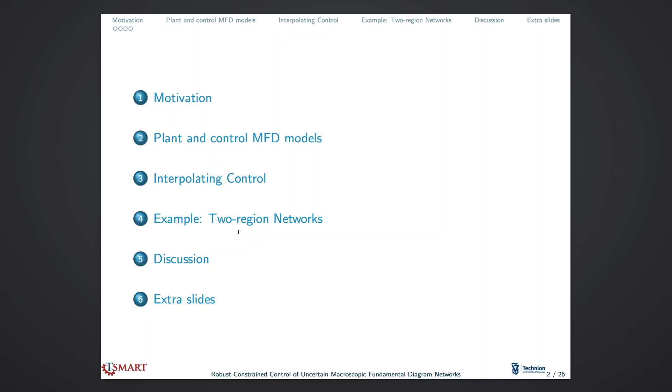The first one is the network structure. So some works deal with single region networks, while other works consider networks consisting of multiple regions.

Regarding heterogeneity, okay, someone should turn off their mic because I hear an echo. So regarding heterogeneity, there are some works that have treated heterogeneous networks by partitioning them into homogeneous regions, while recently a few works have integrated heterogeneity modeling into the MFD framework.

The dynamic equation based on MFD, in most research works, relates the average traffic network flow versus accumulation, but there are other works that relate total travel distance against total time spent.

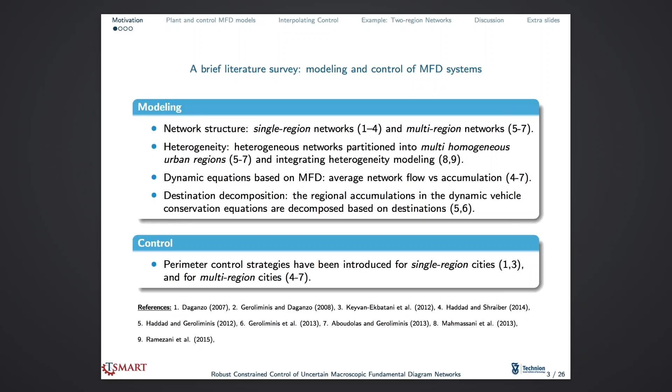These control strategies have been designed according to different approaches. One of the classical approaches is classical feedback control, resulting in a PI or P controller, or whatever feedback controller. This approach operates according to fed information, but without the need to predict near-future dynamics or demand. On the other hand, it does not allow direct consideration of the control constraints; these are usually imposed after the control design process.

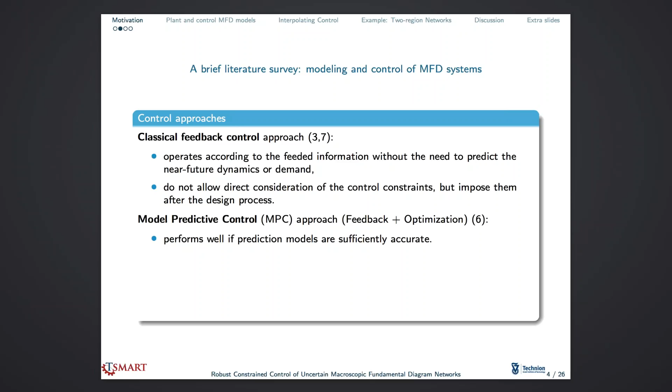Another approach is more like feedback combined with optimization. It's called model predictive control, which, roughly speaking, includes not only feedback but also optimization for a finite prediction horizon in order to integrate future dynamics. In other words, these kinds of approaches are proactive, not only reactive. This approach works well if the prediction models we assume are sufficiently accurate.

Recently we have introduced a robust control approach for perimeter control by utilizing the classical robust feedback approach. We have utilized QFT theory, quantitative feedback theory, to design perimeter control. We designed a robust perimeter control that can handle the uncertainty of the MFD.

And what do we mean by handling uncertainty in the MFD? What is uncertainty for us in the MFD is that it can have a scatter of flows for the same accumulation. In this work, the control constraints are explicitly integrated within the design level.

We use a special approach called the describing function. But we applied QFT only for one urban region, because QFT is suitable to design for only one urban region, or maybe two regions, but for larger systems it would be difficult to utilize.

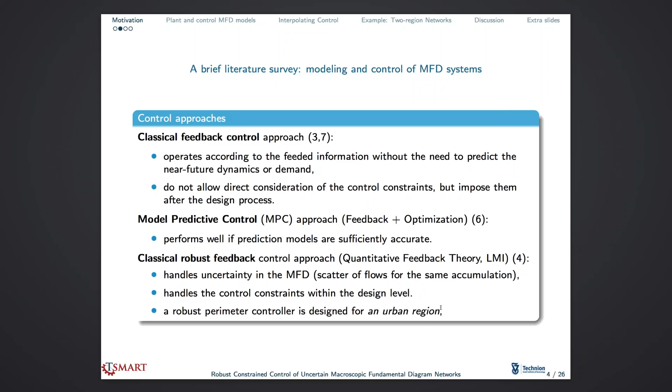Now the hypothesis in all this research is the following: if the distribution of vehicle density is heterogeneous such that it affects the shape and the level of scatter of the MFD, what we call a heterogeneous network, then two things follow. One, we can introduce improved macroscopic models suitable to model such a heterogeneous network. Second, robust perimeter control strategies based on these models, which I focus on, are suitable.

Now, in this current paper, this hypothesis is not only for the current research but also for follow-up research that I'm doing now in the lab.

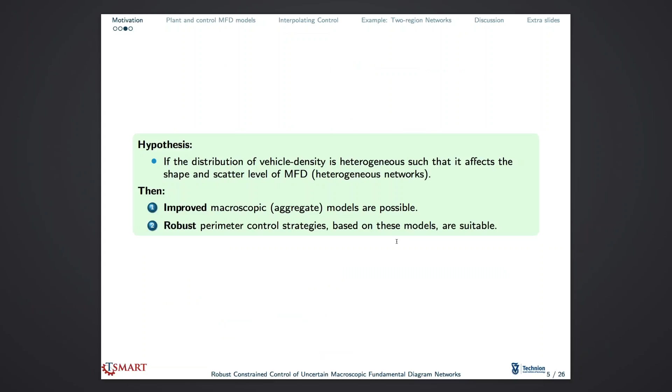But in this specific paper, to improve the modeling, we aim at reflecting the uncertainty by considering the MFD as an interval function with specific bounds. So instead of having one nominal function, because of the scatter, we consider it to be within an upper envelope and a lower envelope of the MFD. This is what I mean by an interval function.

And then we can also reformulate what we will do. We will reformulate the nonlinear model—because the dynamics we introduce are nonlinear—as a linear model with parameter uncertainties. So we take out the nonlinearity terms by introducing uncertain parameters.

Regarding the control, we aim at designing robust perimeter control and integrating the control constraints in the design by utilizing the interpolating control approach.

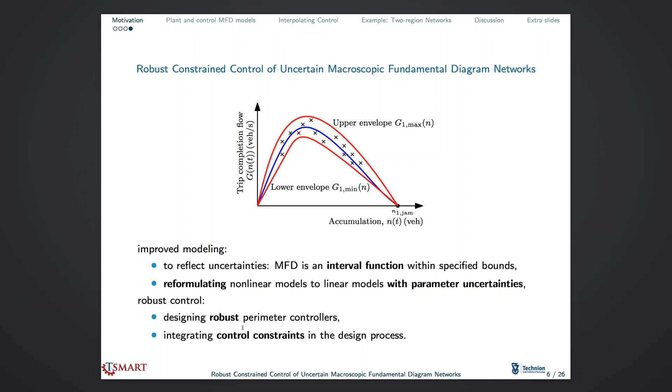Now regarding the system dynamics, we will consider the dynamics of a multi-region MFD system. Let's assume we have a network partitioned into regions, as you can see here: region I, region J, and R. Let us denote the demand Qii, which is the demand from I to I, and Qij, the demand from I to J. Let us denote the number of vehicles traveling from I to I by Nii, where Nij is the number of vehicles traveling from region I to region J, and the total number of vehicles inside region I is simply Ni.

And the exit flow of the MFD, we denote by Gi, which is a function of Ni. Regarding the perimeter controller, we denote it by Uij. So Uij is a perimeter control that constrains the flow that can travel from I to J.

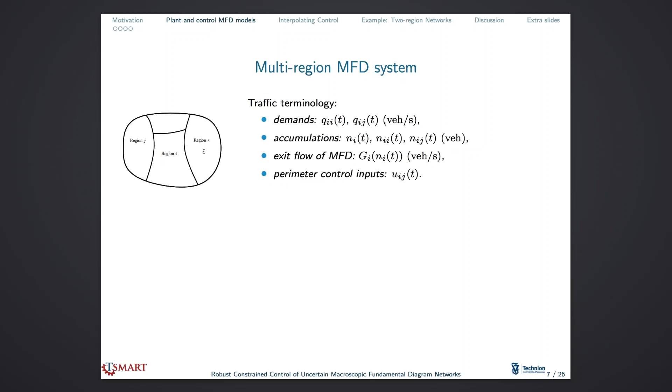Now, the dynamic equation is simply a vehicle conservation equation. Let's focus on region I, this region in the middle, and let's see what's going on there.

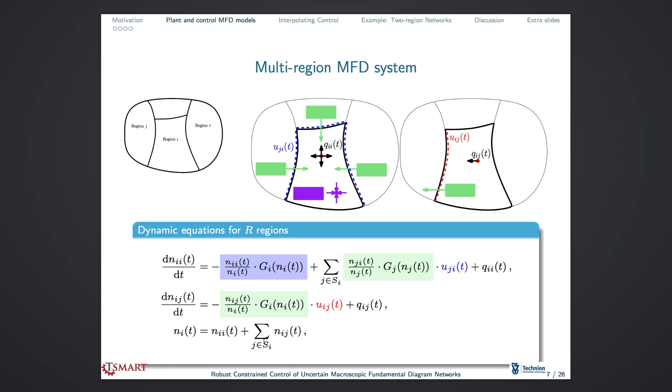Once we do this, we get the following equation for region I, but as you can see, we still have one equation which depends on NII, NIJ, and NI, and this model is still nonlinear.

Now what we want to do is extract the nonlinearity. Physically, in transportation, it would be difficult to estimate NII and NIJ, the number of trips traveling from I to I, maybe if you have a lot of sensors, but it's difficult, especially internal trips not traveling through the border, so it's difficult to estimate.

So the idea that came to my mind is to introduce parameters, which we call destination decomposition parameters. We denote the fraction NII divided by NI as alpha I, and NIJ divided by NI as alpha IJ. These alphas are between minimum and maximum bounds, so they can vary within these values, but the min and max can be estimated easily if you have some historical data.

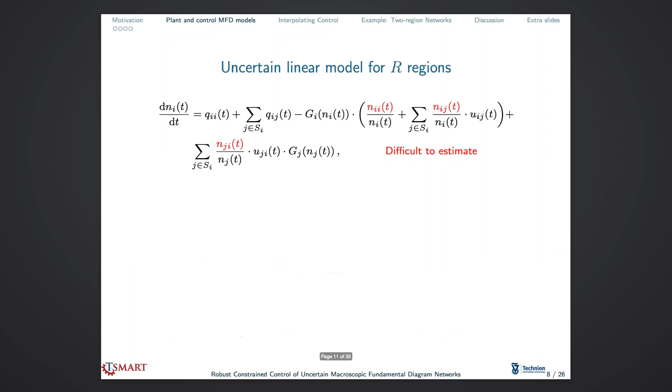Now what we need to do is actually a regulating to origin problem. What do we mean by that? We set here a set point and we aim to reach these set points. So if we want to reach these set points, this means n of t should be close to n hat, and u of t should be close to u hat. This means delta n and delta u should go to 0. This is what we mean by regulating to origin problem in control theory.

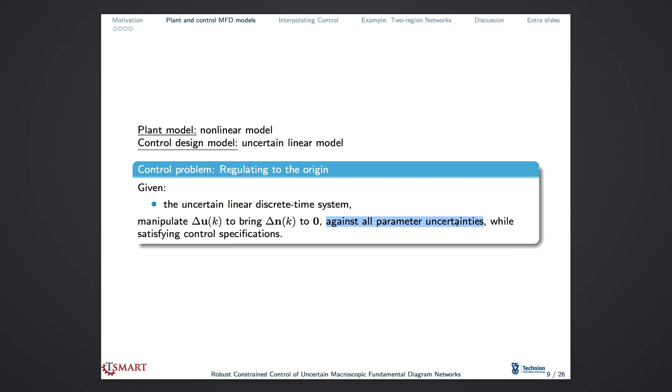So given the uncertain linear discrete system presented one slide before, manipulate delta u, the controller, to bring delta n, the differences of all accumulation in all regions, to the set points, so delta n will be 0. But the important thing in this formulation is that it should work against all parameter uncertainties, not like classical control without uncertainty, but here it is more robust control. So it should account for all the uncertainties, all the alphas, or if you want, also the heterogeneity in the MFD.

Okay. So how do we solve this?

I utilized, and it's still a developing, new advanced control approach called interpolating control. So we do robust state feedback by interpolating control. I cannot describe all of it in detail, but this approach has the following important properties: first, it guarantees robustness against all parameter uncertainties, which is what we want. It handles control and state constraints, and most importantly, it presents computationally cheap solutions.

Now, what is the main idea of this interpolating control? From the name, interpolating means to interpolate between two controllers. So the set of actions here...

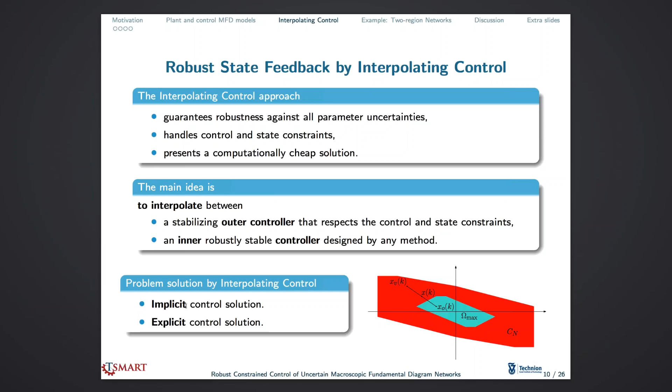In order to solve this by interpolating control, we can introduce two solutions, implicit and explicit. Let's explain the implicit solution a little bit more. We said okay, we have an inner controller here in the blue. The nice thing in this approach is that we can utilize whatever controller we want, so we utilize an unconstrained robust controller, but it should be a robust asymptotically stabilizing controller.

So we simply use a regular PI controller, a simple PI controller that can do the job. What do we mean by can do the job? That it is robustly asymptotically stabilizing. And according to this controller, there will be a corresponding maximum robust invariant set.

This is the set omega maximum, which is the set of all x's here in blue. What does it mean? First, this should include the origin, as you see here. Second, it should satisfy the constraints for all x inside this set. Third, if you are inside this set, at the next step k plus 1, the state will stay inside this set. This is what we call a robustly invariant set.

Now, once we have the controller and we can build this set omega maximum, the maximum invariant set, we can also calculate sigma Cn, which is a robust n-step control invariant set. This robust control invariant set is the set of all x here inside the red, satisfying the constraints, for which there exists a control sequence that can drive you from the set Cn to inside omega max in no more than n steps. So again, if you are here, in no more than n steps, 1, 2, 3, 4, you will enter the omega max.

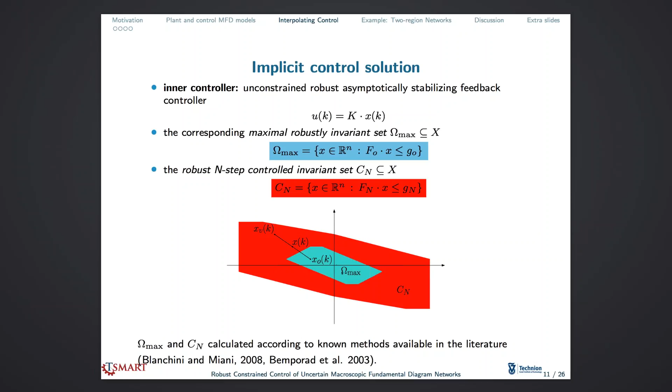Now, how we calculate this, I cannot go into details, but I refer to two references in the literature, so you can know how we calculate it. But again, first you assume a controller, and then you calculate omega max, and according to omega max, you build the C.

Now, the idea is that once you have this, any current state x of k here. So what do you mean by state? State here I call it x, but remember the state of the system is the number of accumulations in the regions, the set of all the accumulations in all regions. So any state x inside the Cn can be decomposed by this formula: an interpolation coefficient multiplied by the sum of xv, plus 1 minus c multiplied by x0.

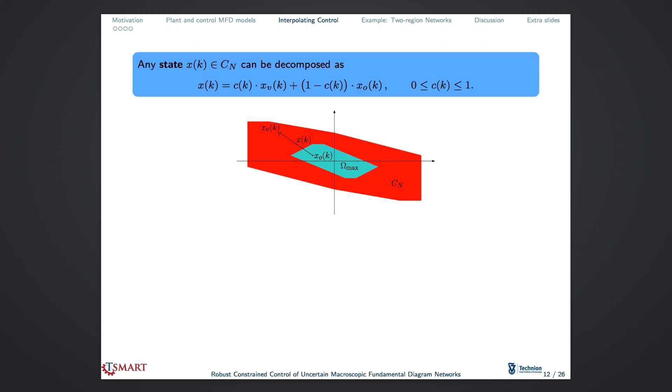Now why do we do this? We do this because we want to calculate the best control at x. The idea is that it should be interpolating between the inner controller at x0 and the outer controller at xv. So first we decompose the state like this, and then, as proven in control theory, the control law at x, u of k, is actually equal to the same coefficient used to decompose the state: C of k multiplied by UV plus (1-c) multiplied by U0. It's the same coefficients.

This control guarantees robust asymptotic stability for all initial states. So if you apply this control at each time step for each x, you will eventually go to the origin, to 0,0. Now, what is the controller U0?

Controller U0 is the control inside the inner controller, which we chose in advance as a proportional controller, as you can see here. And UV, outside in the outer controller, is the so-called vertex controller, which we need to calculate. I won't explain how we calculate the vertex controller for XV, or how we calculate C, which is needed in order to calculate X and then U.

In order to do this, we need to solve two LP problems. LP problem 1 is the decomposition of the state X, so we calculate exactly what C of K is. The second LP problem is to generate the vertex controller, so what is the UV for XV. I don't explain it here, but if we have time I have more slides and can explain it later.

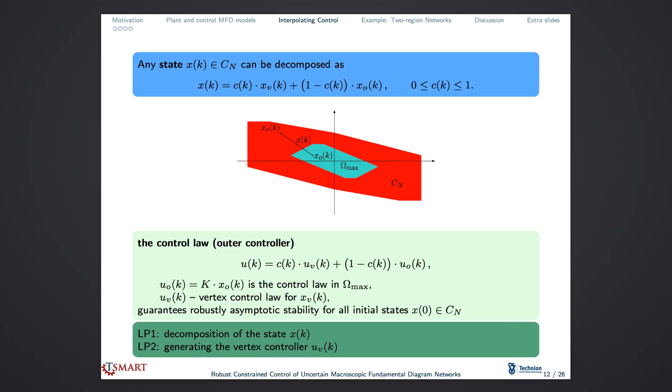Now regarding the explicit solution - this is the implicit solution. What do you mean by explicit solution? At each time step you have to solve these 2 LP problems online, apply the controller, and move on. But there's another option, a nice feature of this interpolating control approach: instead of computing the control at each time step as a function of the current state X, the control law can be a priori computed offline in explicit form, as a piecewise affine state feedback over a polyhedral partition of the state space. What does this mean? I will show in the example - if it's not clear now, don't worry, you will see in the example.

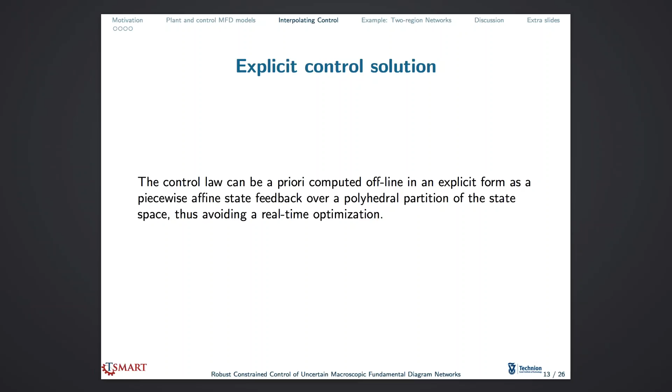Okay, so now let's take one example: a two-region network. We have two regions, two MFDs, and we don't take the whole range - not from 0 to n max for both regions - because the idea is that if we succeed in designing a robust controller for the whole set with uncertainty, the controller will be expected to be very conservative, resulting in poor performance. Why? Because you take the whole set, the whole options from 0 to n max. You can do it, but it will be very conservative.

So what we decide to do is divide the cases into special cases, mode 1 and mode 2, which we believe are more recurrent situations in traffic conditions. For example, mode 1: both regions are regulated around the set points, which is in the uncongested regime here - this is N1 hat, N2 hat. And the other one is where you need to regulate one region in the uncongested state and one in the congested state.

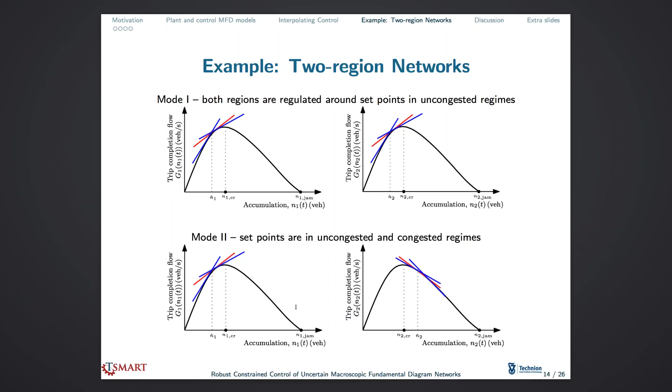For mode 2, our goal is clearly to be far away from the congested regime, since it's unstable and leads to gridlock. But sometimes during peak hour, when demand is too high, we might aim at regulating around a set point temporarily, near the critical accumulation, in order to prevent the system from becoming more congested and going to gridlock. That's the reason I also try to analyze mode 2.

Now let's take example 1 for mode 1. We took N1 hat and N2 hat as 3000. I remind you, 3000 is here, critical is around 4000, so we are in the uncongested regime. We took uncertainty for alpha between 0.3 and 0.7, so it should account for all the possibilities of alpha.

For the accumulation, we chose a region near the set point, between 1,500 and 3,300. Here we plotted the maximum and control invariant set, again from 1,500 to 3,300. On the x-axis, n1, all admissible states are covered, shown in red. This means each state inside this region can be stabilized, because there exists a control that brings you to the maximum invariant set, and then to the set point, which is 3,000 and 3,000.

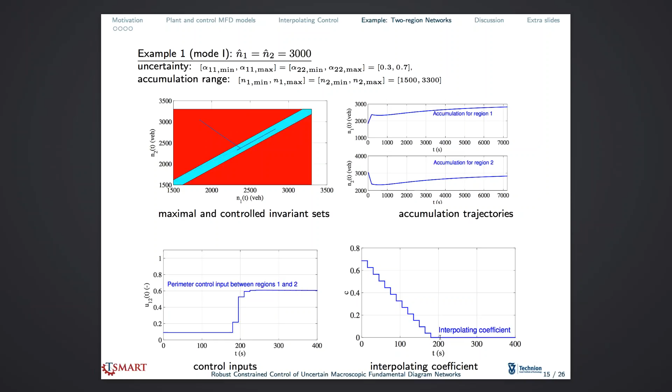Now the control starts from 0.1, so it's preventing or limiting flow traveling from 1 to 2, and then it goes to 0.6 — this is the interpolating coefficient between the outer and inner controller. It starts high for the inner controller, and once you enter, it becomes C0, so only one controller works.

For mode 2, we took 3,000 and 4,000 for region 2. Similarly, but the interesting thing here is that not all states of N1 and N2 are covered in red. This means that if you're here, the system will not be stable. With the current situation, if demand doesn't go down, if it's still high, you can't do anything — you need to wait. This goes to gridlock.

These regions are very helpful for transportation engineering, from an engineering point of view, because you gain more information about the system. We have another paper called Stability Analysis, already published in Transportation Research Part B, that deals with this kind of issue — if someone is interested, I can send an email. But that paper used a nonlinear model, whereas this is a linear model.

The nice thing is we get almost the same regions. Here you can see the initial condition, and again it goes to the steady state we designed, to the equilibrium we wanted.

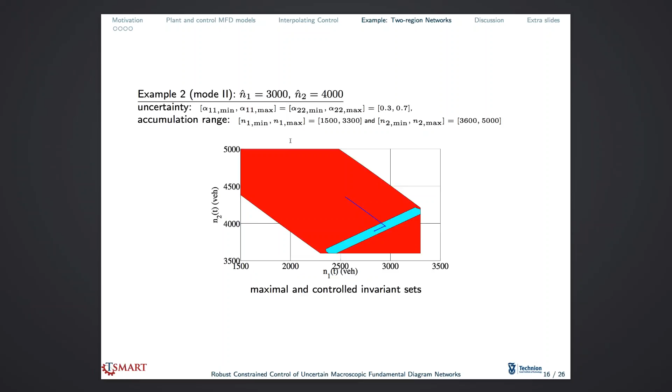Now, the explicit solution — I really like this. I didn't believe we'd get it because of the number of regions, but for 2 regions it's still okay. We calculated the optimal control offline for example 1. Here you see delta N1, delta N2, and the state is partitioned into 5 regions — one small, then 2, 3, 4, and another small one in the corner. For each region, the control input is a piecewise function of the state.

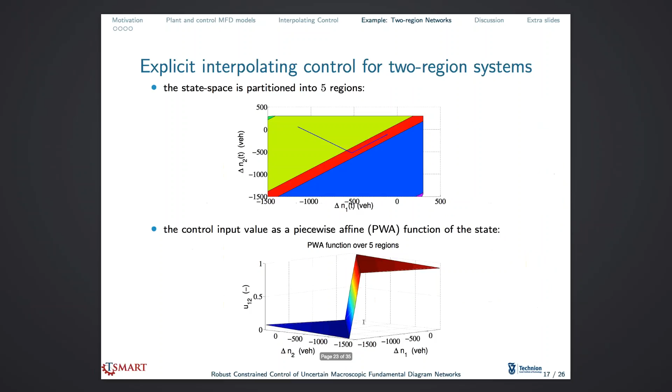The x-axis here is delta N1 and delta N2 in this figure. Depending on where you are in the state space, you plug into this piecewise function to get the control — and this is calculated offline, so in real time you just need to know where you are. That means each time you check delta N1 and delta N2, determine which region or partition you're in, and then plug in to get the control.

So this is faster than the implicit solution, which is also fast, by the way, because it's linear programming, but this would be much faster. It will take some time to figure out which state belongs to which region, but we have a very good algorithm for this.

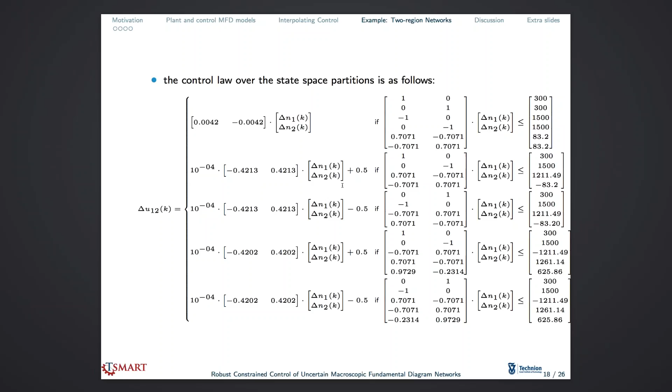Now, if we compare it with other controllers in the literature, what we have here is implicit interpolating control, explicit interpolating control, the MPC controller, which I implemented according to another work we already published in this area, and we also utilize an LMI controller, which roughly speaking is a way to solve a robust classic controller designed in one of the papers.

So we wanted to compare and see the positive or negative perspective of this interpolating control.

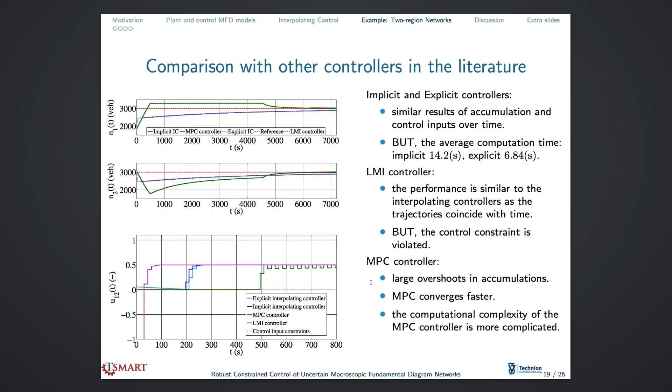Now, to summarize, the main contribution of this paper is that the nonlinear vehicle conservation equations are transformed to a linear equation with parameter uncertainties. These parameter uncertainties include the destination decomposition fraction, which is difficult to estimate in reality, and also allow you to integrate the scatter of the MFD. The uncertain linear model is utilized to design a robust feedback controller using the interpolating-based approach. The robust control is presented as an implicit and explicit solution, and the comparison results demonstrate the performance advantages of applying the robust interpolating controller. That's all.

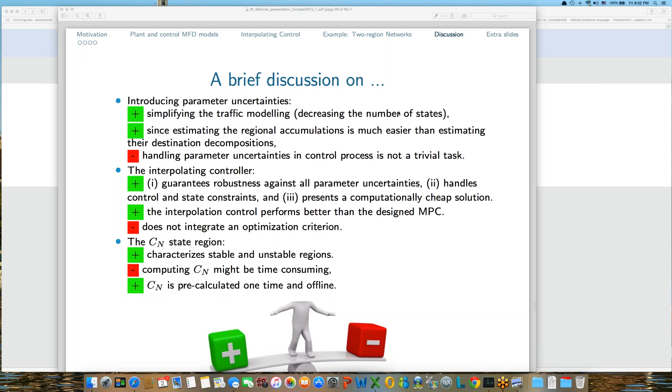So let me start with a question about the MPC approach you showed. You mentioned that your method allows it to converge faster. The MPC converges faster than my method.

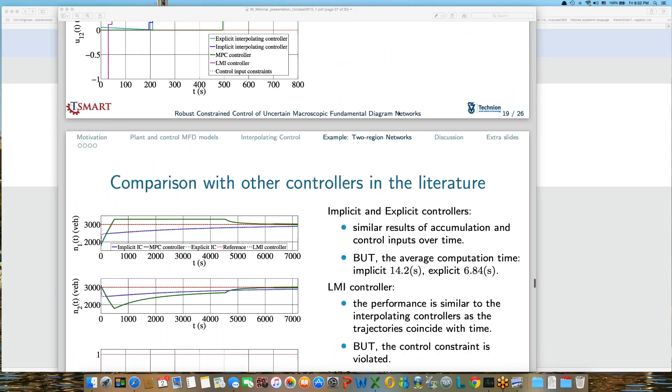And the reason is that MPC has an optimization criteria, so at each time step you do an optimization, to reach, let's say, the destination or another objective function, but you have an optimization function. Unlike my approach, or not approach, I just implemented it, not like the interpolating approach. With the interpolating approach, you don't have an optimization at each time step. You have some LP problem here that you need to solve in order to decompose.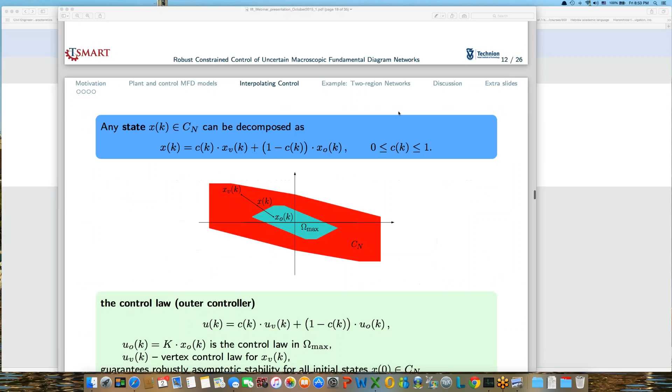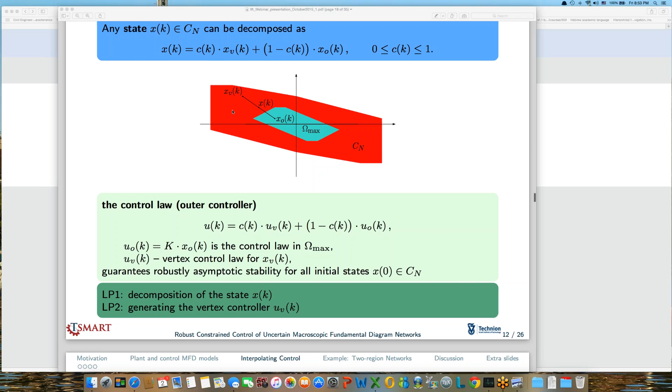This is what we mean. The prediction model is good. Otherwise, you will not see good results or convergence like this. So in my case, I tried to choose a really very good close model and plant and control model in order to be fair in comparison, or in order to take the extremum of this interpolating control approach and to check it.

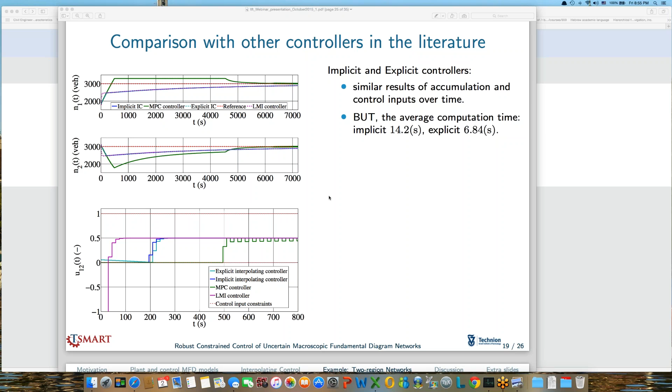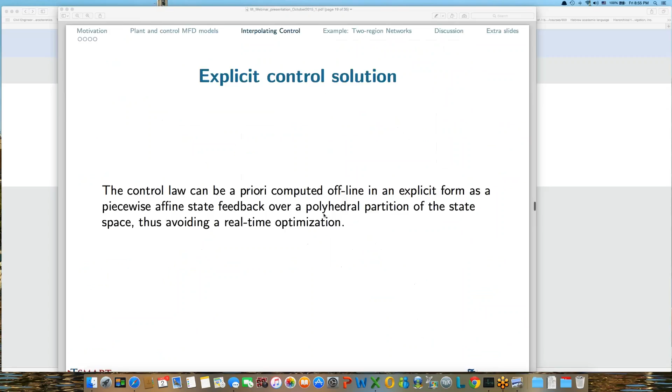Okay, I think I got it now. Can you explain the equations for LP2? Let's try. Hi, Rama. Okay, yes. So the LP2, let's start with LP2.

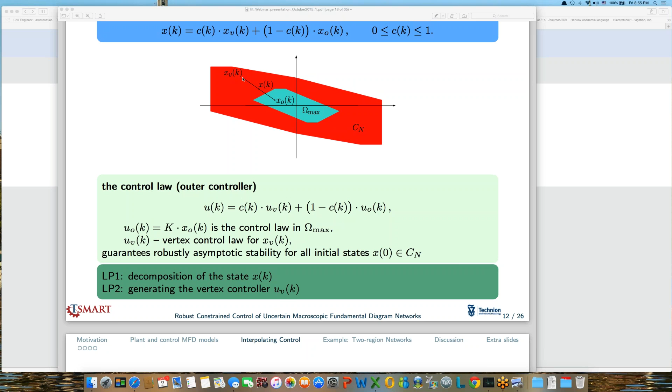What is LP2? LP2 is UV here. So it is the vertex control law for the state XV. Okay, so let's go a little bit. I have a slide here actually.

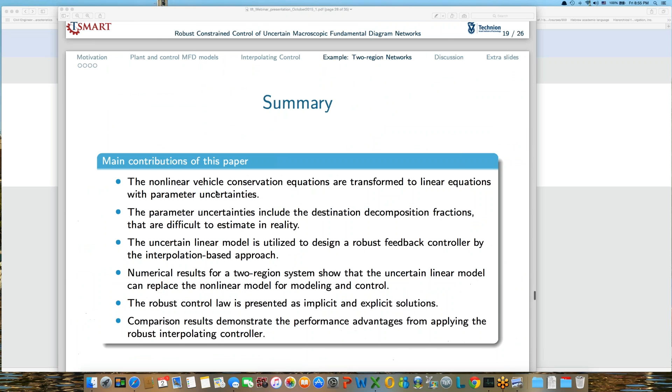And now the CN can be decomposed into a set of simplices. So we have here 1, 2, 3, 4, 5 simplices. And in each simplex you see here you have x1, x5, and you have controllers u1 and u5. So these controllers you can calculate. And if you are at x1 and you apply u1, it definitely will take you inside the set. And if you are at x5 and you apply u5, it also takes you inside the set.

So in order to calculate what the control here is, which is uv, it's not written here as uv, but this is what we mean. The vertex control at the state x should be, look at the equation here, some weighting between all the vertex controllers here, u1 to u5, and the origin. As you can see here, sum from i to p, or i to 5, si multiplied by ui. So it should be some interpolation between u1 and u5 in order to give you the best u.

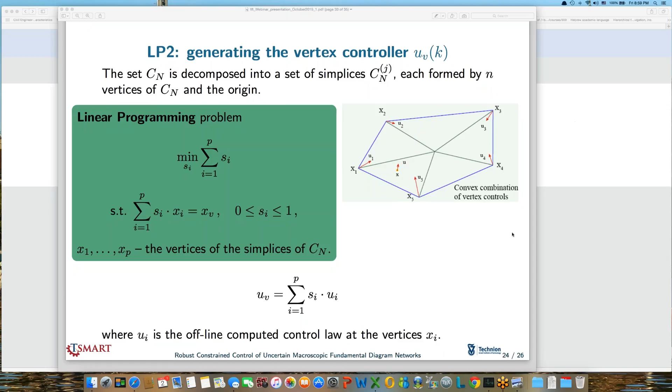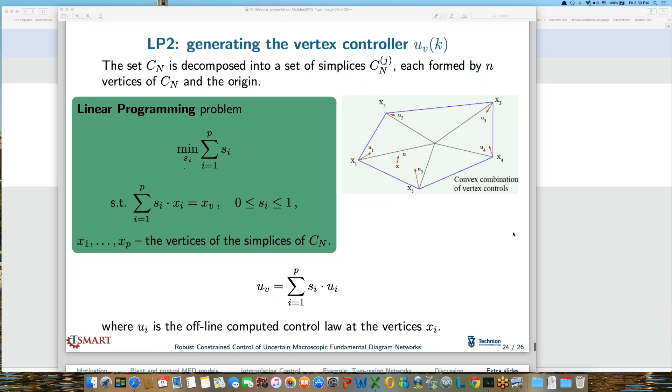Okay, did I answer your question, Rama? Okay, good. But if you have more questions, I think you can see my email here or on the website, and I'm happy even to talk about this more. I mean, it's very difficult to explain in more detail in 1 or 2 minutes, but we can discuss it more if you want. I'm happy to discuss it more. I can send you also the paper related to the vertex control. Okay.

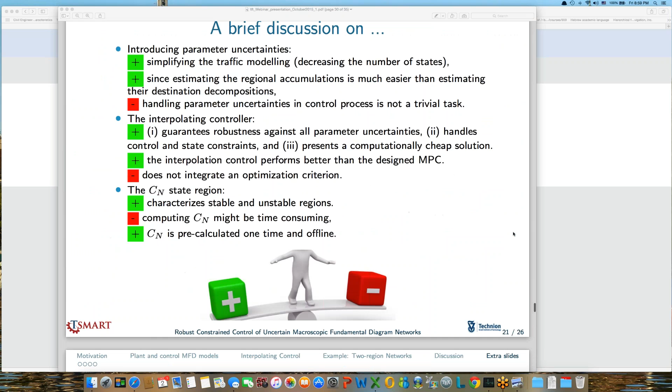Is there any more questions? If not, I can have here a brief discussion, maybe raise some questions. Well, I put here some brief discussion on some issues. Okay, Rama, so you repeat both LP every time step, and does that not give you... What do you mean by oscillation, Rama? I mean, no.

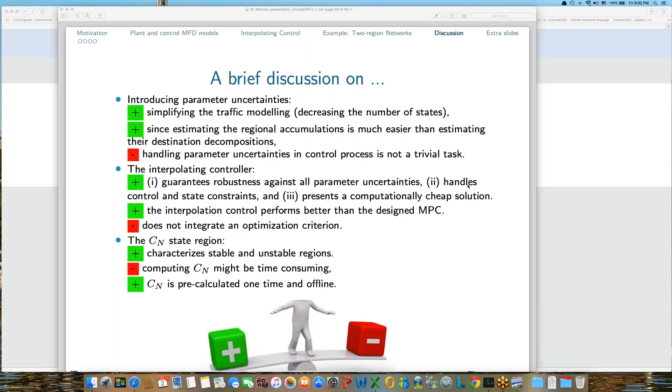It is okay. There is a lemma in the book of Nguyen that this, by LP1 and LP2, will bring you inside the sets, and eventually it will guarantee robust asymptotic stability. So for this control law, I don't show the proof, I don't have it here, but it is proven that eventually it will go and guarantee robustness, stability, sorry, asymptotic stability, taking into account also the uncertainty.

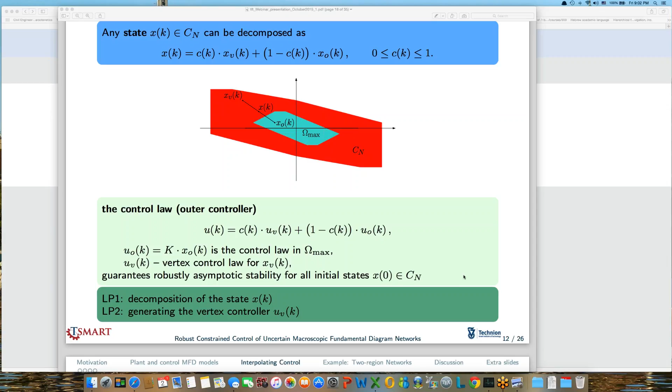Let me complete this, we can have 5 minutes more because some of these discussions came up after you worked on this in detail. On one hand, I introduced uncertainties here, and it was nice because it really simplified the traffic modeling, decreasing the number of states. If you remember, we had NII, NIJ, NI, and eventually for region I ended up with only one state, NI. So you simplify traffic modeling by decreasing the number of states, because you say all the rest is parameter uncertainty.

Estimating uncertainties is helpful here because it's very difficult to estimate the destination decomposition. But the issue is, from a control point of view, handling parameter uncertainties in the control process is not a trivial task. I felt this when I utilized traditional robust feedback control approaches like QFT and others. It's more difficult when you have more and more regions - one region or two regions is okay, one or two uncertainties is okay, but when you have more and more it becomes more difficult.

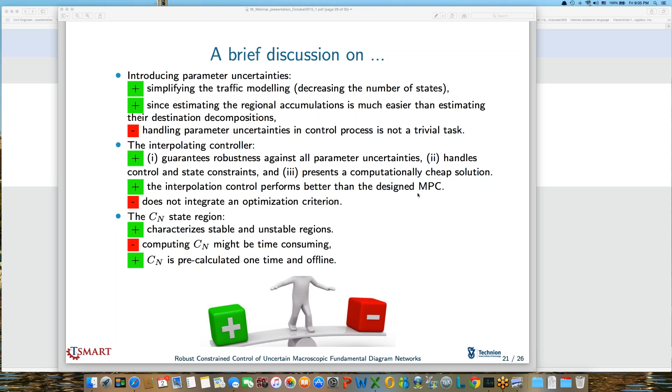Regarding interpolating control, its properties guarantee robustness - this is positive, it handles control constraints, and it's a computationally cheap solution. The interpolating control performs better than the designed MPC. As Jorge asked, the MPC converged faster, but I forgot to mention, and I'm glad I remember now, look at the overshoot.

In order to converge faster, it makes large overshoots. So the state should go to 3000, but it goes to 1900. If you accept this - which is a little problematic for engineering, because you go down to 1900 in order to converge faster, but not much faster than the interpolating control - if you accept this, do it. But again, in my opinion, these overshoots are...

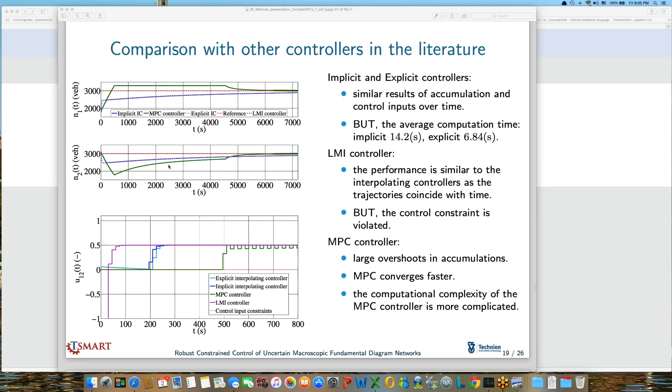I don't really like them, and this is the reason I mentioned that interpolating control performs better than the MPC. The only issue, which I already mentioned in my answer to Jorge, is that the interpolating controller does not integrate an optimization criterion. So our goal, like any classical feedback control, is to regulate some state values, some accumulation, to predefined specific values that we believe, if we reach them, will be optimal because they'll be at the maximum flow of the MFD. But there is no optimization criteria.

Regarding the CN, the nice thing is that it's characterized as stable and unstable regions. Computing the CN, the red regions, might be time consuming, and it actually does take time - you need to wait in order to calculate it. But in interpolating control, it doesn't matter, because you can pre-calculate it offline. You only need to calculate it one time, according to what you assume in the inner controller. Once you define the inner controller, you compute this once, offline, so even if it takes time, you shouldn't worry about that.